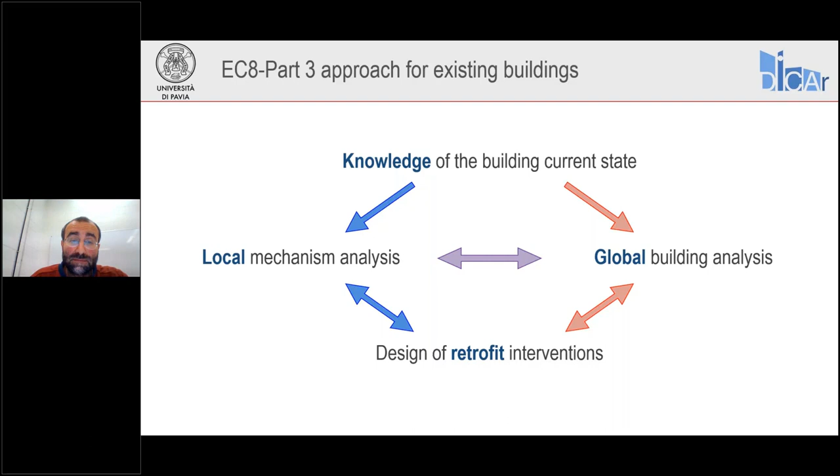So let's start from the first ingredient of the framework, that is the knowledge of the building that we are analyzing. Now, there is a useful table in Eurocode 8, table 3.1. When I say Eurocode 8 for existing buildings, I'm always referring to Eurocode 8 Part 3. This table basically defines different levels of knowledge. We have three levels of knowledge, and it allows us to determine in which of these levels we are, given the knowledge that we have about our building.

The first part of this knowledge is related to geometry. To determine the geometry of the building, we can make use of outline construction drawings if they are available, if we can find them. For historical buildings, this may not be so easy. For more modern buildings, instead, it's more likely that we can find them. Then we may have to carry out some surveys in the field. If we have good construction drawings, a visual survey may be enough just to confirm that the drawings correspond to reality, or to adjust where we have some inconsistencies.

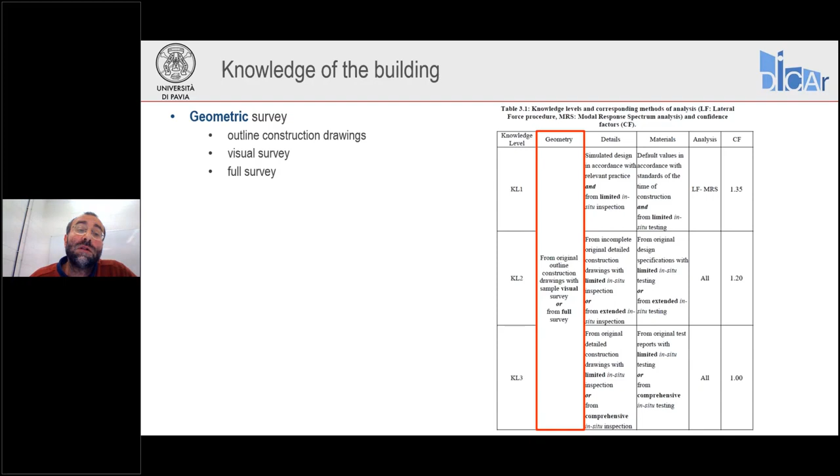But in some cases, especially if we don't have any drawings available, we may have to carry out a full survey of the building. Then we need to investigate the construction details of the building. In the most unlucky case, we may have to carry out a simulated design if we don't have any information. But in some cases, we may be able to find detailed construction drawings where these construction details are shown. In any case, we also have to go on site and perform some inspections, which can be more or less limited, extended, or comprehensive, depending on what knowledge level we want to reach, and also on the available material in terms of construction drawings that we have found.

Then we need to characterize the materials of our building. Again, we may need to refer to some default values, but we may also be more lucky and have sources such as original design documentation or original material testing results, and we may be able to refer to these values. In any case, it's also better to perform some on-site testing, and again this testing can be more or less extended, going from limited to comprehensive, depending on the amount of elements that we are investigating, again to confirm the choices or assumptions that we are making.

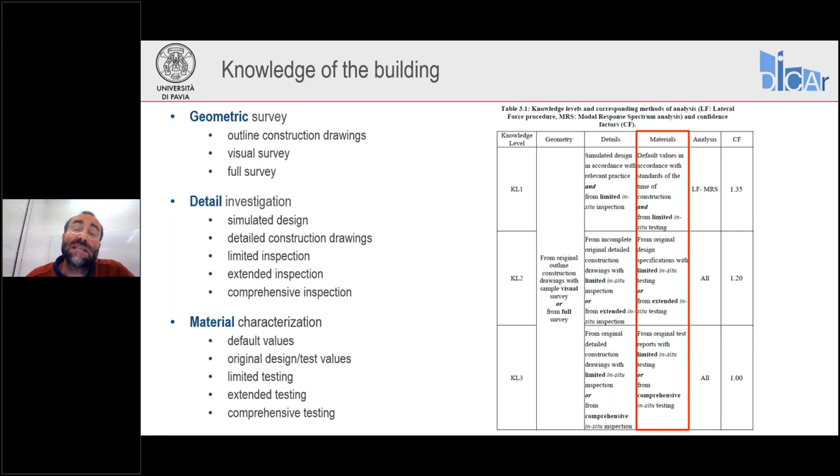At this point, we can define our knowledge level, depending on the combination of available documentation, on-site inspection, and testing that we have carried out. We have three levels of knowledge: KL1, KL2, and KL3.

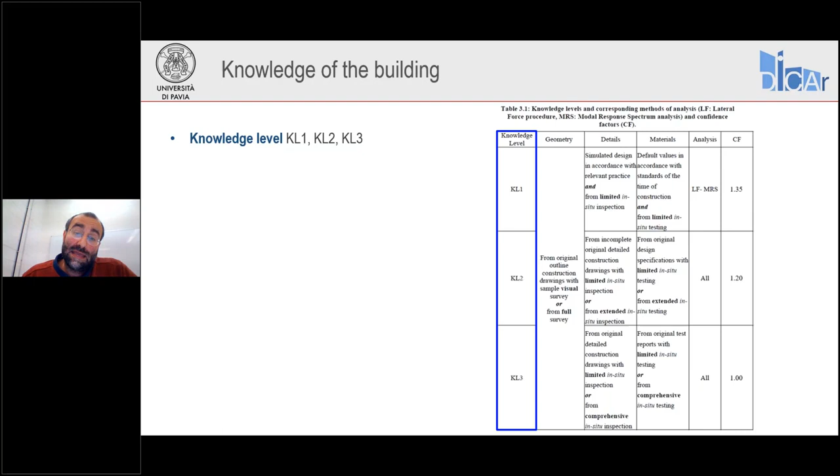Each knowledge level is associated with possible analysis methods for the global analysis of the building. If we are in the less favorable case of knowledge level KL1, where we have less information, we can only carry out elastic analysis, which is usually more conservative. We don't have enough information to build a nonlinear model, so we need to go with the more conservative methods.

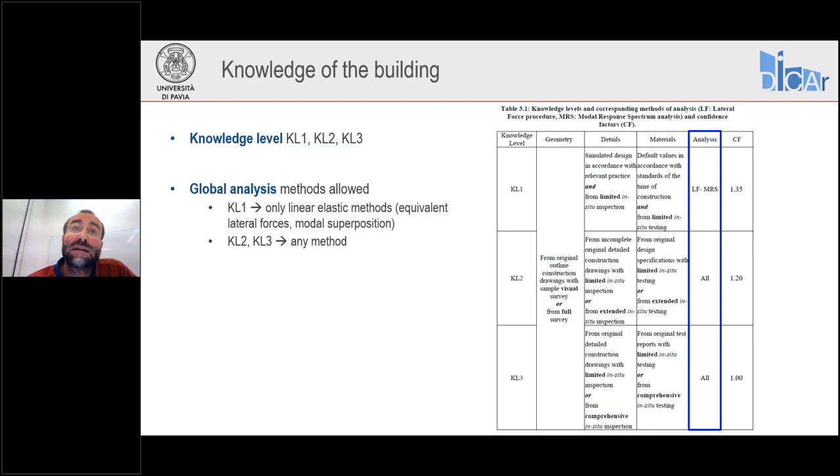If we have more information available, more documents, or carry out more on-site investigation and testing, then we can be in knowledge level 2 or 3. In this case, we can use any method: linear, elastic, or nonlinear, static or dynamic analysis.

Also, from this table, depending on the knowledge level, we can get the so-called confidence factors CF. These factors are usually applied to material properties. When we calculate the strength of members in terms of capacity, we use these factors to reduce the average values of the material properties.

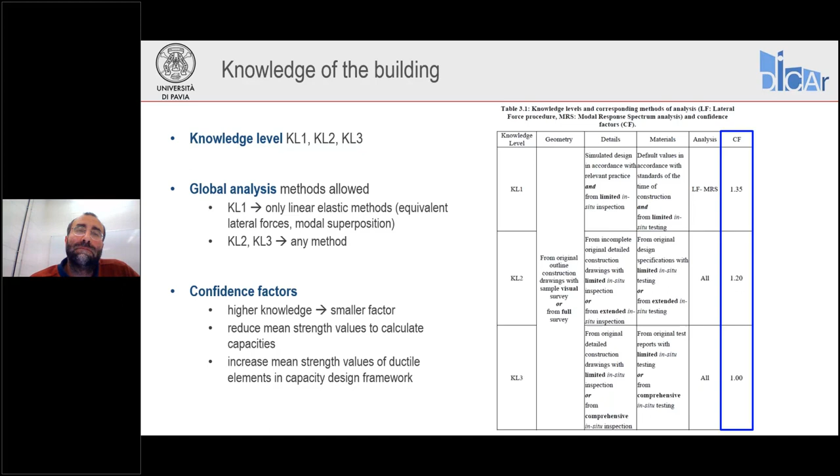You can see that these confidence factors decrease from 1.35 to 1.0 as the knowledge level increases. But these factors are also used to increase the mean strength values when calculating the strength of ductile elements, to find the forces transferred to brittle elements in a framework of the capacity design type.

Now, how do we obtain this information? First of all, we try to find any document available about the building, so we can carry out a historical analysis and document investigation, looking for original drawings, permits, whatever we can find in public offices, designer offices, wherever we can find information about the building.

We may also try to investigate the history of the building in terms of construction process, modifications that have occurred over time, trying to understand if the materials are consistent throughout the building, or if there are additions or modifications with new or different materials compared to the original ones.

We may also need to refer to historical practices and look for older codes, if there were codes at the time of construction, because this may guide us in understanding how the structure was built.

Finally, we also want to find information about any possible damaging event that the building may have undergone, and these events may have created weaknesses, or induced modifications or retrofits in the past.

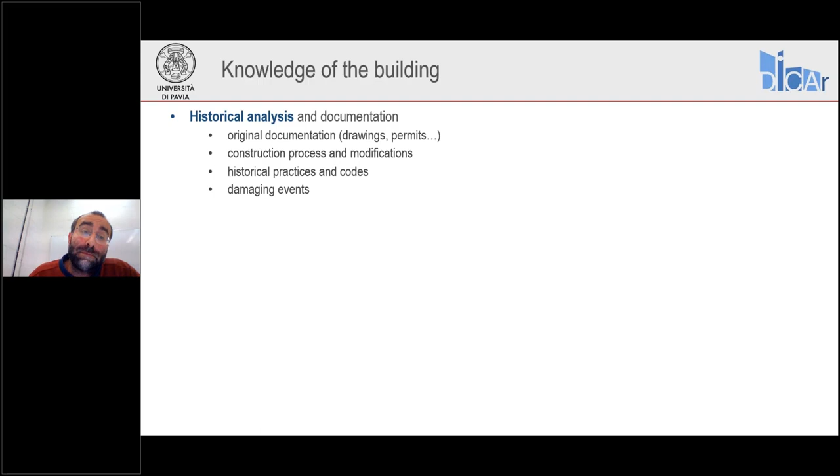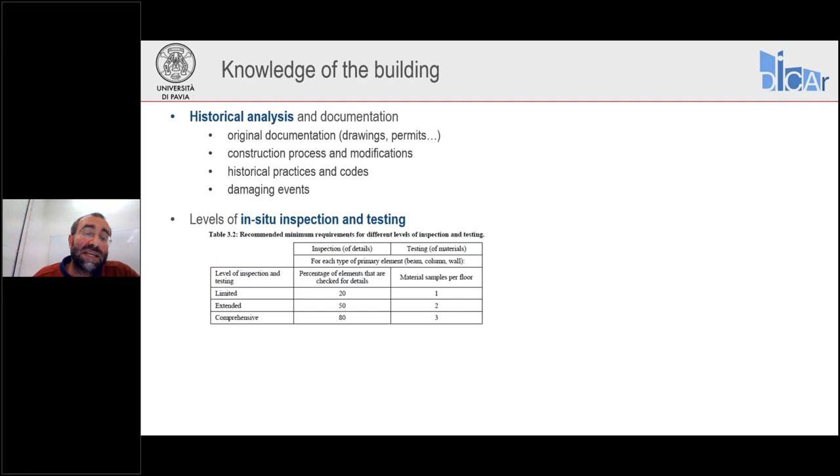Then, as I was saying, we will have to carry out on-site investigations, inspection of details, and material testing. The Eurocode provides another table which guides us on the amount of elements that need to be investigated in order to reach these limited, extended, or comprehensive levels of inspection and testing.

Finally, in terms of material properties, it's always the case to carry out some non-destructive and destructive tests on the building, in different amounts depending on the knowledge level that we want to reach.

For this, we can use, for example for masonry structures, flat jack test, shove test. We may even take samples of masonry and bring them to the lab, where we can perform direct shear tests on triplets.

So there are quite a few different destructive techniques that can be used, and they can be combined with non-destructive methods, because we need to calibrate these non-destructive methods with the results of the destructive tests.

But now we have a problem. We cannot test the material everywhere in a structure, especially with historical buildings that may have undergone modifications over time, where materials can differ depending on where we are. We may not be able to investigate all different types of materials, or we may select a region of the building where material properties are higher or lower than elsewhere.

So how can we deal with this? The Eurocode doesn't tell us much - it says we can refer to other sources of information, but doesn't specify which ones. With the Italian code, the so-called NTC 2018, we find some guidelines on what reference values to use to integrate the results of on-site testing.

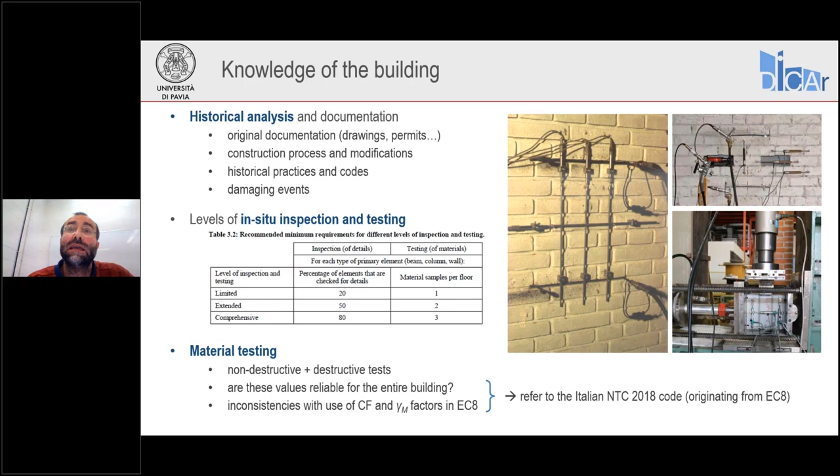Again, we can look for some guidance in the Italian code also for this aspect. Why the Italian code? Well, it stems from Eurocode 8, so it's somehow compatible with the framework proposed by Eurocode. However, differently from the Eurocode, it has been widely applied in practice since 2003, with further modification. The first edition of these guidelines was in 2003.

So in the NTC 2018, we can find a table with material property ranges. It's important to consider these as ranges. We have minimum and maximum values for different properties: compressive strength, shear strength, elastic modulus, shear modulus, for different types of masonry, starting from irregular rubble stone masonry, going all the way to more modern and more organized masonry textures.

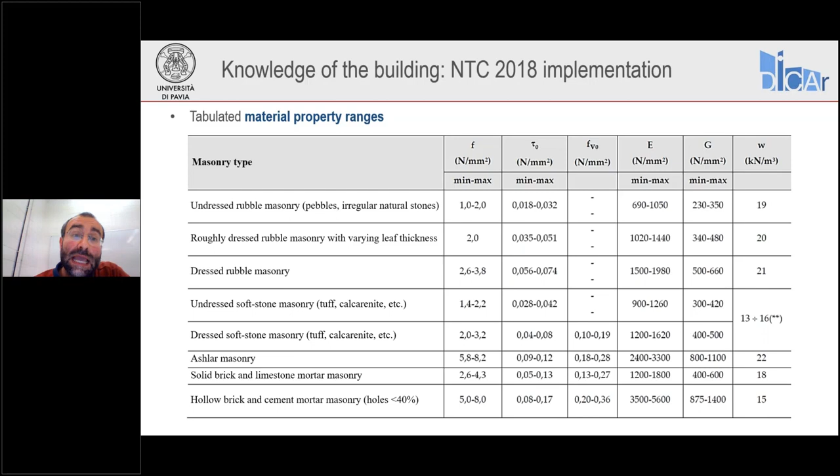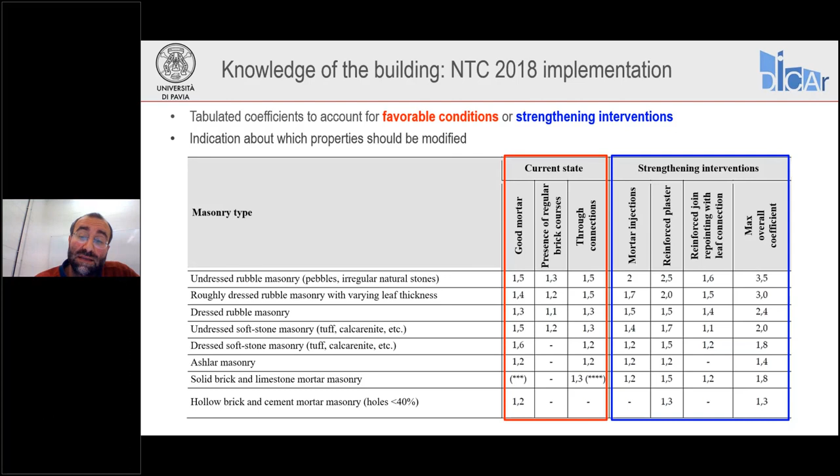Looking at these tabulated values, the Italian code says that if we are in the lower knowledge level, KL1, we need to take from these tables the minimum strength values and the mean elastic moduli values, and the strength values shall be reduced by a confidence factor of 1.35 as in the Eurocode. In knowledge level 2 instead, we take the mean tabulated strength values and elastic moduli, and the confidence factor reduces to 1.2 as in the Eurocode. Finally, if we are in knowledge level KL3, we can combine the mean tabulated strength values and elastic moduli with those determined from on-site testing.

And we perform a so-called Bayesian update procedure. We will see this better in the next webinar of this series, where these aspects will be treated more in depth, showing how to perform this procedure.

Now, this is not yet in the current edition of the Eurocode, but something similar to what is in the Italian NTC 2018 will be included in the upcoming edition of Eurocode. So you will find in the new edition something similar to what is presented here, based on the existing Italian code. Also, the tabulated reference properties will somehow be included in the new Eurocode version.

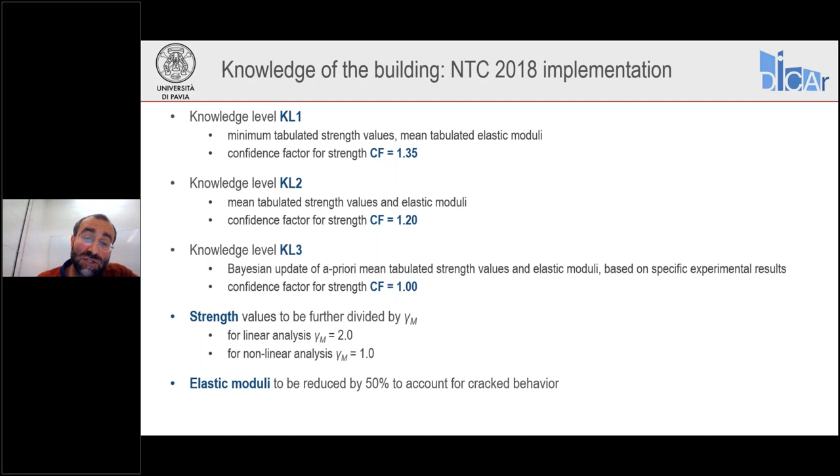The last aspect I want to mention about knowledge of the building is, in reality, what performance requirements we have to expect and ask of our building—so what are the limit states we have to consider? The Eurocode for existing buildings, Part 3, mentions 3 limit states: 2 ultimate limit states, near collapse and significant damage, and 1 serviceability limit state, damage limitation. Consider that significant damage is very close to the no collapse limit state in Part 1 of Eurocode 8, the one for new construction. In the Italian code, there is also a 4th limit state, another serviceability limit state, full operationality, which is not included in Eurocode.

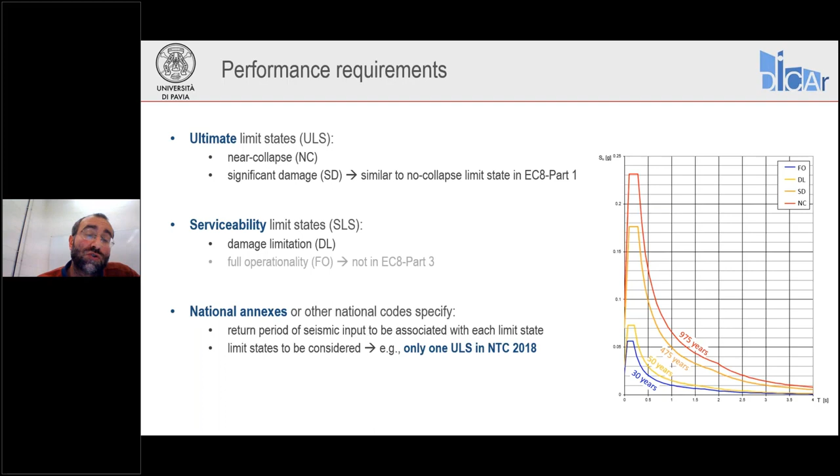EC8 refers to national annexes or other national documentation for the selection of the return periods associated to each limit state, and also to select which limit states should be considered in the analysis. For example, if you follow NTC 2018, for most buildings we only need to refer to 1 ultimate limit state, either near collapse or significant damage—we just verify one of these. Only for strategical buildings do we need to also consider serviceability conditions.

Now, let's move to the next ingredient of the framework, which is the analysis for local mechanisms. Let's start from this video of a shake table test of a masonry building that was performed at the EUCENTRE laboratory a few years ago.

If you look at the yellow circles, you will see that the facade, excited out of plane of the building, is trying to overturn out of plane, developing a so-called local mechanism. This building was not retrofitted in any way. There were no restraints to that facade, and you can see that a mechanism of this type developed at a level of PGA equal to 0.4 G using the 1979 Montenegro earthquake.

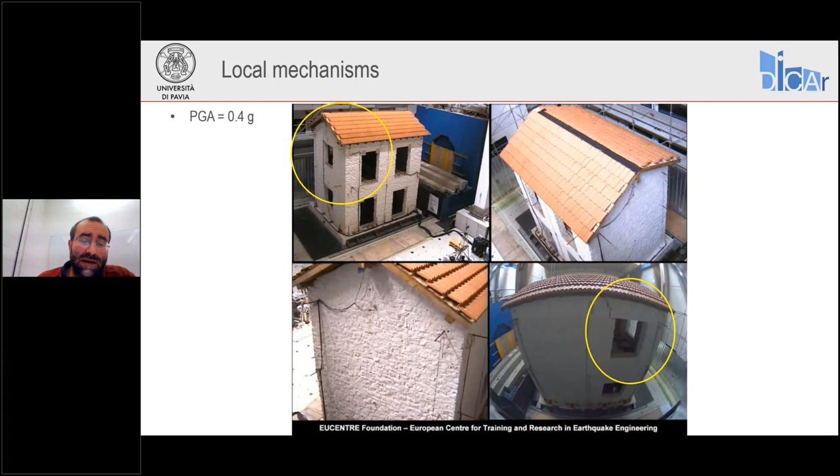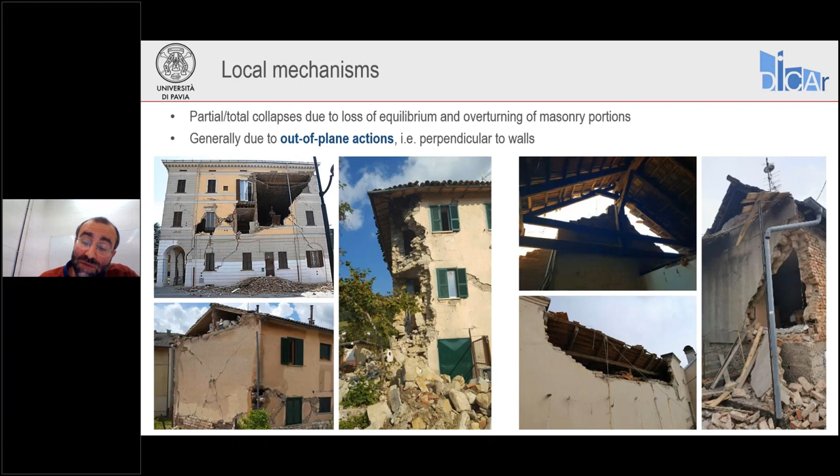What are these local mechanisms? Well, these are failure modes that are related to loss of equilibrium of portions of masonry, related to overturning out of plane of these portions of masonry, leading to partial or total collapses. Usually they are due to out of plane actions, that is, accelerations acting perpendicularly to the wall panels.

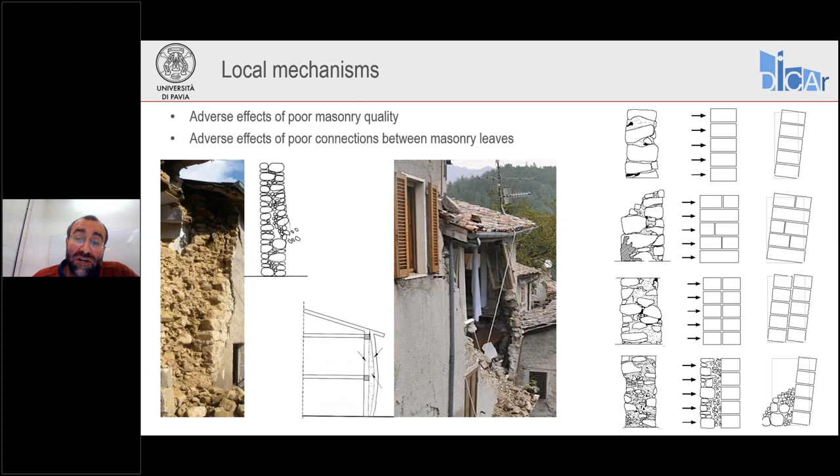These local mechanisms are usually adversely affected by the quality of masonry. For example, if we have rubble stone masonry with very poor mortar, or with round stones, with masonry leaves poorly connected with each other, with loose filling between the leaves, all these conditions may lead to the development of local mechanisms, starting from buckling of masonry leaves and loss of infill to overall overturning of these walls.

Also, the thrusts coming from roof beams, from arches and vaults may have an adverse effect on this local mechanism. They may push outwards the walls. And also irregularities in plan and in elevation may cause the activation of such mechanisms.

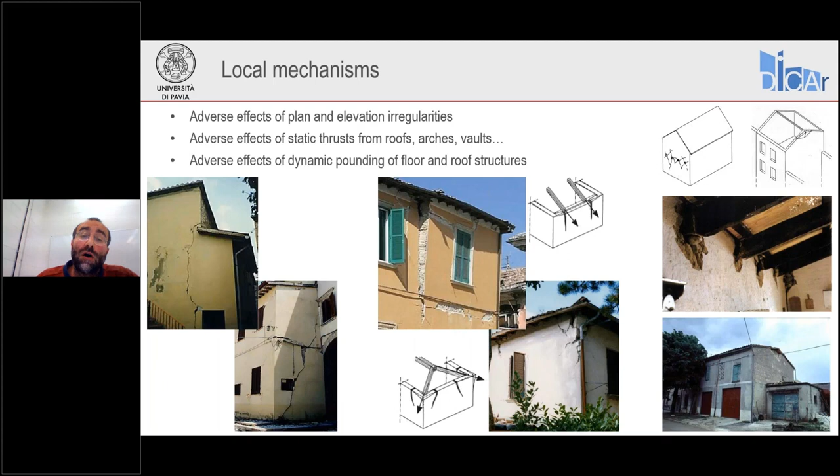Finally, pounding between poorly connected floor or roof diaphragms and walls can also lead to the development of this local overturning response.

Instead, we can find favorable conditions when we have good interlocking between intersecting walls. You see here on the left-hand side, we have a case of weak interlock between the perpendicular walls. And in this case, as shown in the photo, you can see that one of these walls is detaching from the rest of the building in an overturning mechanism.

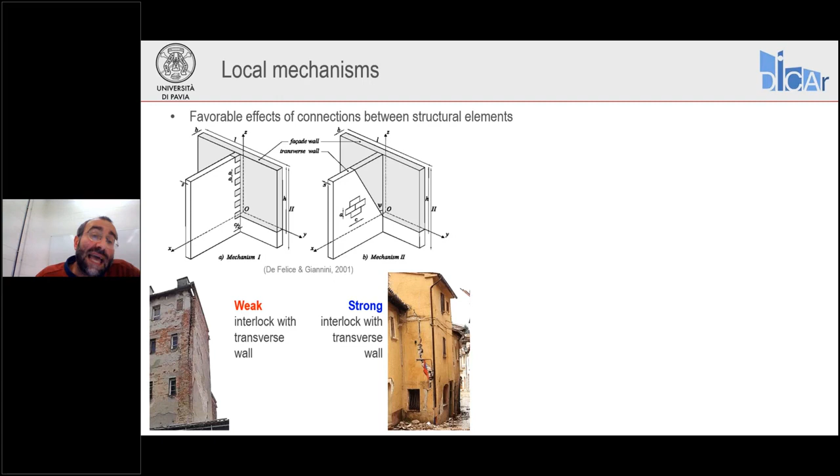Instead, if we have good, strong interlock between the intersecting walls, as in the right-hand side case, we can see that for the wall to overturn out of plane, it has to engage a wedge of the intersecting wall. And if the intersecting wall is supporting a floor system, for example, the weight of the floor may help balancing the wedge and basically delaying the activation of this out-of-plane mechanism.

In general, if we have weak interlock between walls and poor wall-to-diaphragm connections or flexible diaphragms, we may be in the most unfavorable case where walls can separate from each other and easily overturn out of plane.

If we improve the interlock between perpendicular walls, but still connections and stiffness of diaphragms are not so good, we may be in a better situation, but still we may have local mechanisms related to bending of the walls out of plane. Instead, if we are able to improve the connection between intersecting walls and the connections and stiffness of floor diaphragms, we may be in the most desirable case.

We develop a so-called box type behavior for the building, as in the bottom case on the right-hand side of the slide. This is the situation that we would like ideally to have.

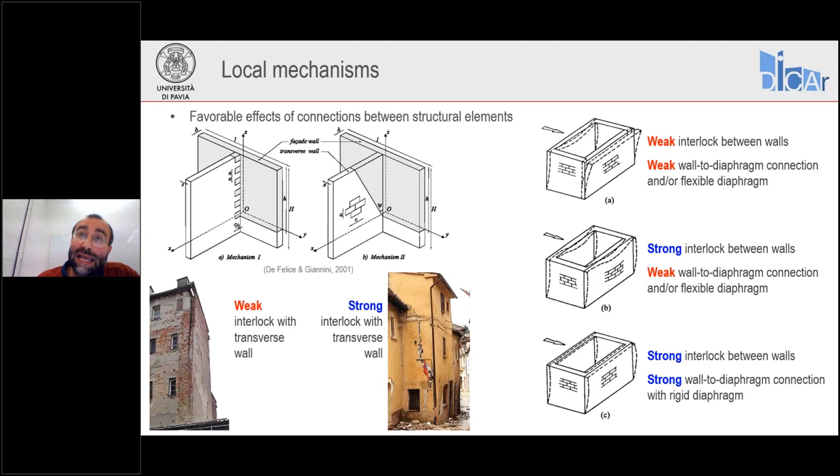How do we analyze local mechanisms? Well, the Eurocode 8 Part 3 doesn't say anything about this topic. The new edition will, but the current one doesn't say anything. So again, we refer to the Italian code, where we find, as the preferred method of analysis, the so-called kinematic analysis.

In this case, the wall responding out of plane is discretized in a series of rigid bodies forming a single degree of freedom mechanism. These blocks are defined by actual cracks that may form in the development of the mechanisms. And the different blocks that are bound by cracks can rotate and slide rigidly with respect to each other. It's a simplification, but it's quite powerful.

Then what we do is study a so-called load multiplier alpha that represents the ratio between the horizontal seismic forces and the weights of the blocks, and the weights also applied by the floors and other structural members involved in the mechanism.

Now, this method is based on the so-called upper bound theorem of limit analysis. What does this mean? It means that the actual mechanism that will develop in a given wall is the one associated with a smaller activation acceleration.

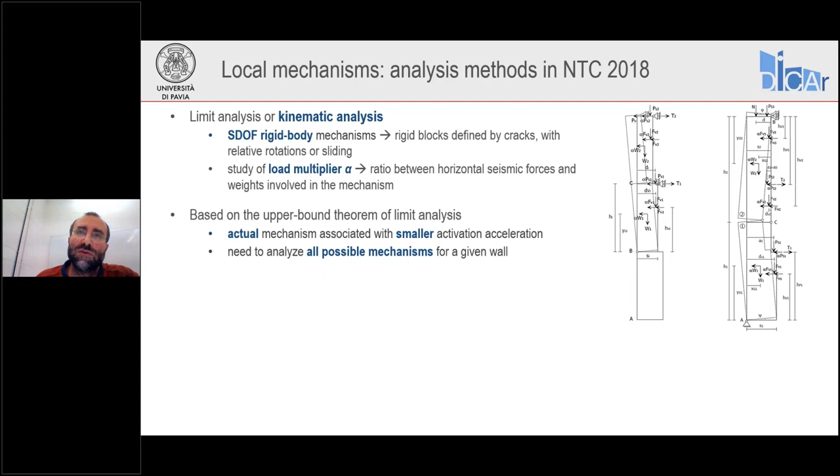Then once the mechanism activates, there will be out-of-plane displacement of the wall. And before reaching an unstable condition, this displacement could be quite large. If we want to investigate this behavior after activation of the mechanism up to collapse, which corresponds to displacement DC0, this is the displacement of a control node of the mechanism.

Well, if we want to look at what happens between activation and collapse, then we need to perform a nonlinear kinematic analysis. With linear kinematic analysis, we consider the acceleration and strength checks at ultimate conditions, while with nonlinear kinematic analysis, we look at the displacement, demand, and capacity of the mechanism.

Linear kinematic analysis is more conservative because as long as the mechanism is activated, for us, it means that you're at the limit. Nonlinear kinematic analysis is more generous because a mechanism may activate, but we may be far from collapse after activation. And so we can exploit more the capacity of the structure if we use this type of analysis.

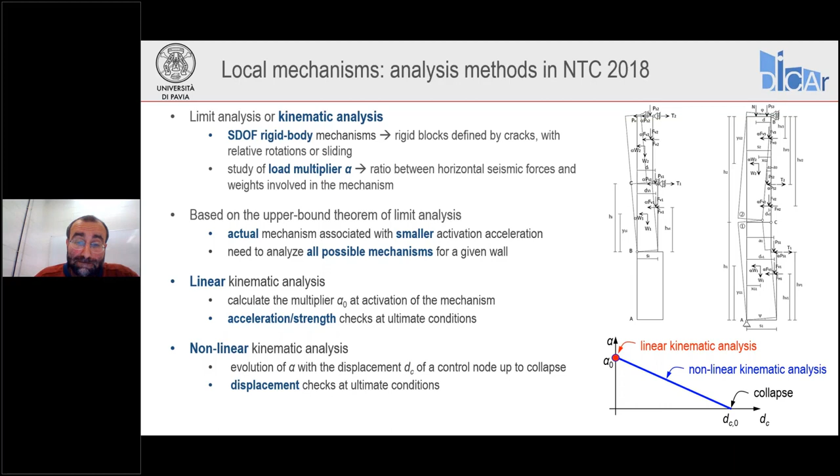How to determine the demand? Well, we have to consider that local mechanisms involving portions of masonry should be considered with their interaction with the overall global structure. There is a dynamic interaction. It's like if we have a multiple degree of freedom system.

Look at the figure at the bottom left. M1 represents the first mode mass of the overall structure. M star, the red smaller mass, is the one associated with the local mechanism only. And it's like having a two mass system in series. So the response of the small mass depends on its interaction with the big mass.

However, if this small mass, the mechanism mass, is significantly smaller compared to the overall mass of the building, then we can make an approximation. We can think of decoupling the two responses, the global response of the building to the ground excitation and the local response of the mechanism, using as input for the local response the global output of the building.

So basically we treat the overall building as a filter between the ground and the local mechanism. We can do this again if the mass involved in the local mechanism is quite smaller compared to the overall mass of the structure, especially the first mode mass, because usually we refer to the first mode.

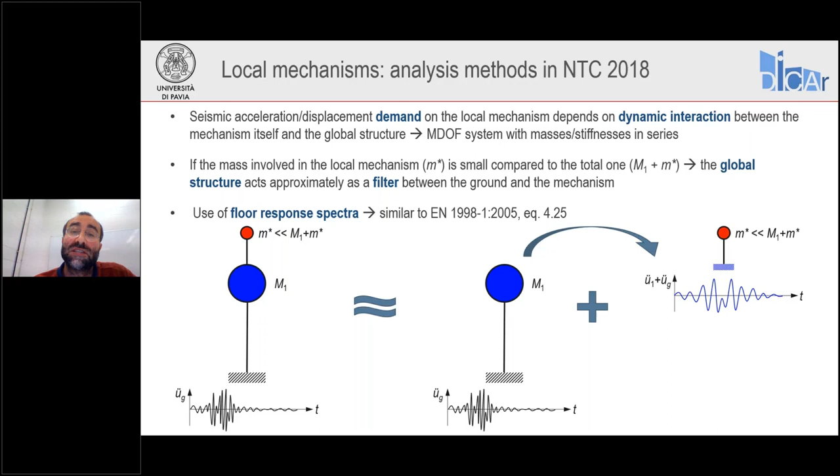In the new edition of Eurocode 8, we will find something more refined than what we have in the current version. And also in the NTC 2018, we find a more refined approach to determine the floor response spectra.

How can we improve the local response of the structure? There are several retrofit solutions that can be adopted. First of all is improving the masonry quality. In this case, we want to delay disgregation of the masonry, or we want to increase the out-of-plane flexural strength of the masonry.

Some techniques involve joint repointing. If the mortar is bad, we can replace part of the mortar joints with new, better mortar. We may also make use of grout injections. These are appropriate if we have a loose filling between the two masonry leaves, so we may want to give some consistency to this filling by injecting grout.

If the masonry is damaged, we may want to replace portions of damaged masonry with new masonry, with the so-called masonry stitching technique. Or we may want to adopt some reinforced repointing across existing cracks.

If we want to improve the flexural response out of plane, we may add vertical reinforcement in slots within the masonry walls. And if we want to prevent separation between masonry leaves, we can use reinforced injections through the thickness of the wall, engaging the two exterior leaves.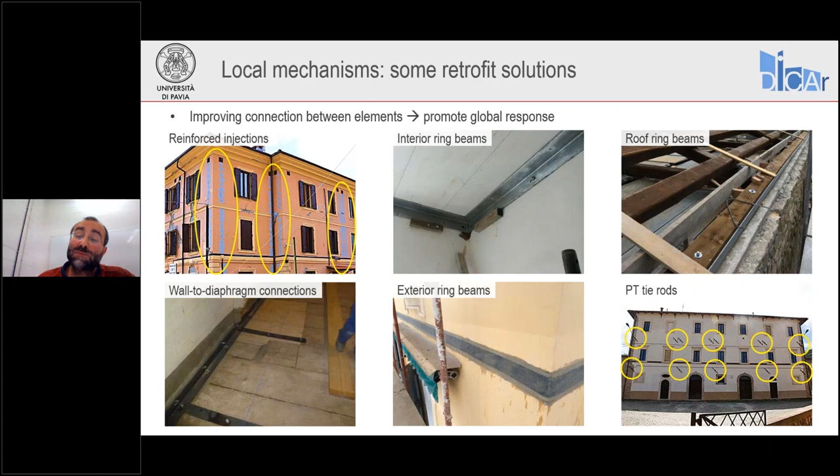Now, if we don't have problems with local mechanisms that are usually responsible for many cases of collapses in masonry buildings, then we can start thinking about the global response of the structure. Let's look again at an experiment.

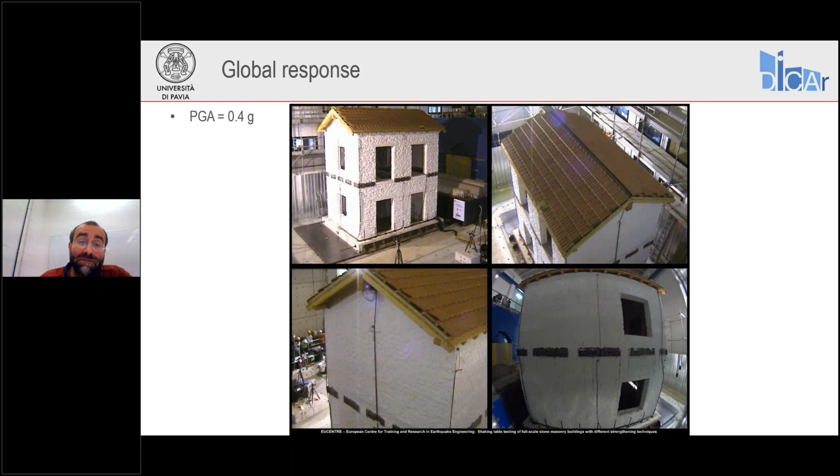This is a building similar to the one we have seen before, but in this case we have a concrete ring beam at the roof and we have stiffened the diaphragms. At the same level of PGA, same input, there is no visible damage from these videos. Same level of input, very similar building, but with improved connections and a stiffened diaphragm. So we go to 0.6 G of PGA, 50% higher, and look at the bottom right.

You see diagonal shear cracks forming in that pier. This is now an in-plane failure mechanism. No out-of-plane overturning of any portions of the walls. We have only in-plane shear failure of that pier. So in this case, we can take more advantage of the strength associated with our masonry walls.

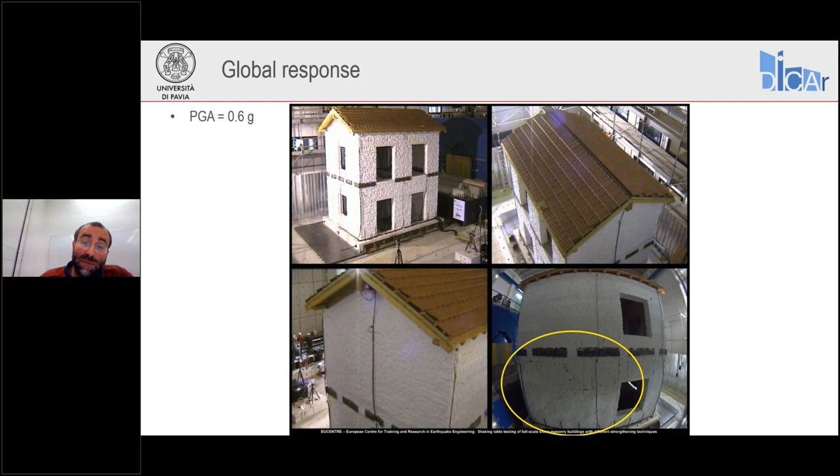Now, when we talk about global response, we are thinking about in-plane response of masonry walls and also of floor and roof diaphragms. Masonry walls typically consist of vertical piers, horizontal spandrels that meet at nodal regions.

Floor and roof diaphragms can be made of timber or other construction techniques, can be steel elements with masonry blocks, can be concrete overlay if the construction is more modern, or we may have vaults if we are talking about more historical buildings. So different systems that provide horizontal connection between the walls.

If we want to be able to consider the global response of the building, we need to have prevented, or mostly prevented, the out-of-plane mechanisms of the walls, so that we can develop in-plane failure mechanisms of piers and spandrels. If all spandrels fail within a facade, we can say we are developing a spandrel mechanism, while if at a given story all piers are failing, we talk about a soft story mechanism.

If you look at the photo, bottom right of the slide, you will see an example. This building was in Amatrice. It was involved in the 2016 earthquake. And you can see that in this building, all spandrels and piers have responded in shear.

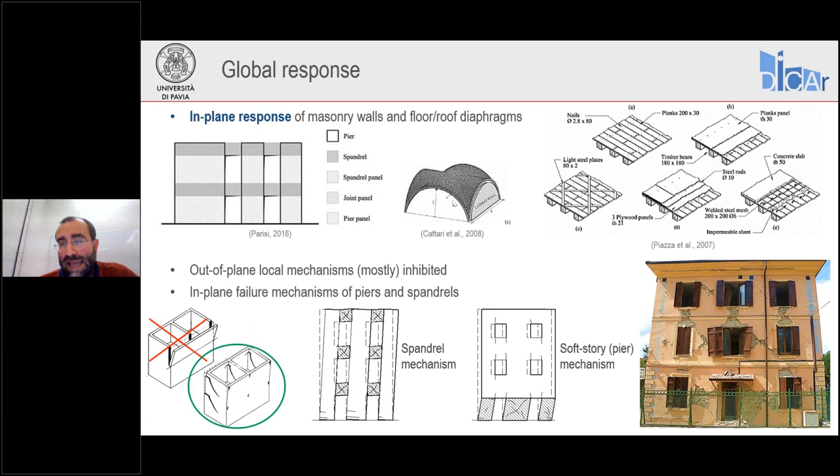We have taken advantage of the strength of all elements in this wall, where the out-of-plane mechanisms were prevented by grouted injections at wall intersections and by steel ties. So in this case, the full strength of the building was used during the earthquake, and in fact, it didn't collapse. It was severely damaged, and in the end it was demolished, but it didn't collapse.

Now, in the Eurocode, we find some criteria related to strength of piers and spandrels. Typically, at the ends of the elements, we can develop cracks perpendicular to the axis of the element related to flexural response. Over these horizontal cracks in the piers, vertical cracks in the spandrels, we may develop sliding. Another mechanism that can develop is diagonal shear cracking.

This usually happens within the panel, pier or spandrel. And depending on the type of masonry and on the strength of the joint, we may have stair-step cracks within weak joints, or cracks cutting through the masonry units if we have strong joints compared to the unit strength, or if we have irregular masonry.

Now, in the Eurocode, we find criteria related to flexural response, flexural strength, and shear sliding strength. We don't find anything about diagonal shear cracking, but we can find information about this criterion in the NTC 2018 code. In any case, varying the axial force acting on the element, any of these criteria will provide a different strength value, flexural or shear strength. So varying the axial stress on the element, one or the other criterion may control the strength.

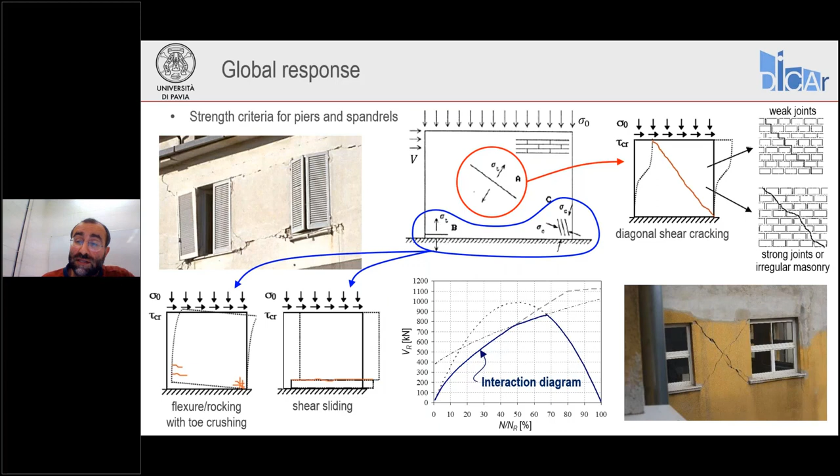In terms of modeling of the walls, we can either use 3D finite elements, but this requires quite detailed knowledge of the material, and it's quite a time-consuming analysis. Or in most cases in practice, we use a so-called equivalent frame approach, where we make use of macro elements and rigid nodes. So you can see we can identify spandrel elements, pier elements, and rigid nodes.

And then we can build our equivalent frame. And in the literature, we can find criteria on how to define the dimensions and the boundaries between the different components of the equivalent frame.

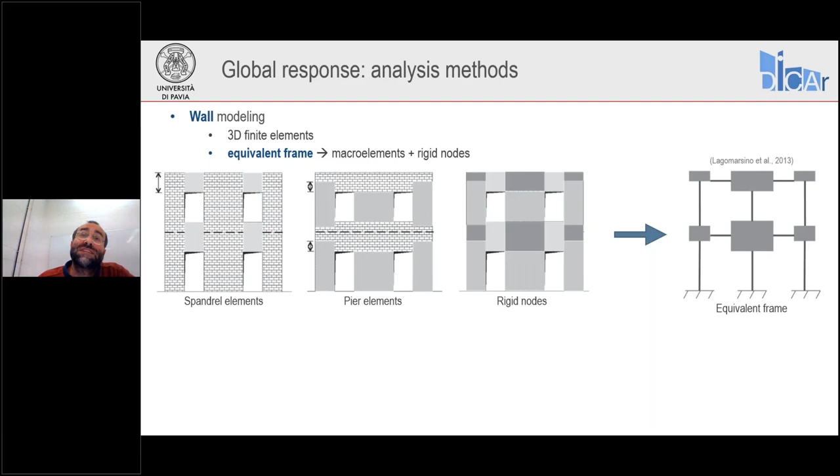Now, this is easy if the wall has regular openings. If openings are irregularly distributed, things become a little bit more complicated. And one of our webinars will be dedicated to how to tackle this particular situation of irregular opening distribution.

We also need to model the diaphragms, the horizontal diaphragms connecting the different walls. And usually we have three different cases. First case is infinitely rigid diaphragms. This is the case when we have, for example, a concrete overlay well connected to timber or steel joists. And these rigid diaphragms allow for a redistribution of the story shears based on the relative stiffness or strength and the in-plan position of the piers and the walls.

Instead, if the diaphragm is infinitely flexible, it cannot redistribute story shears between walls and piers. And in this case, it is advisable to analyze each wall independently, considering its tributary mass. And this tributary mass will produce the excitation on that individual wall.

Finally, the most common case, of course, is intermediate between these two. We have diaphragms of finite stiffness. In this case, we need to evaluate the stiffness based on the construction technique that we have in our situation, and we can use, for example, orthotropic membranes. This is what the program Tremuri, for example, does. And the two axial stiffnesses and the shear stiffness of the orthotropic membrane is calibrated based on the actual properties of the physical floor or roof system.

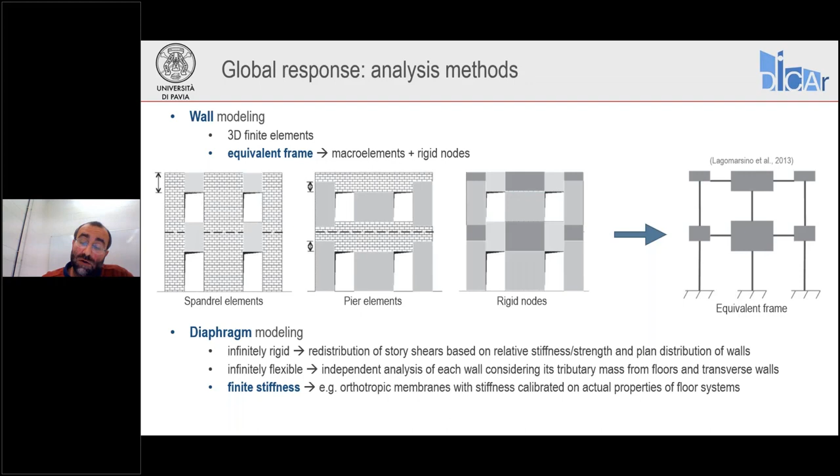The analysis can be based on linear approaches, and in this case, we have to perform strength or deformation checks on the elements of the building.

This is, for example, the case of linear dynamic analysis, where we superpose the different modal responses, but even simpler is the case of equivalent lateral force analysis, which is the linear static analysis, which is very conservative usually for masonry buildings. And depending on whether we are using the full elastic spectrum or we are applying the behavior factor Q, we may have to check deformations of the elements or strength of the elements.

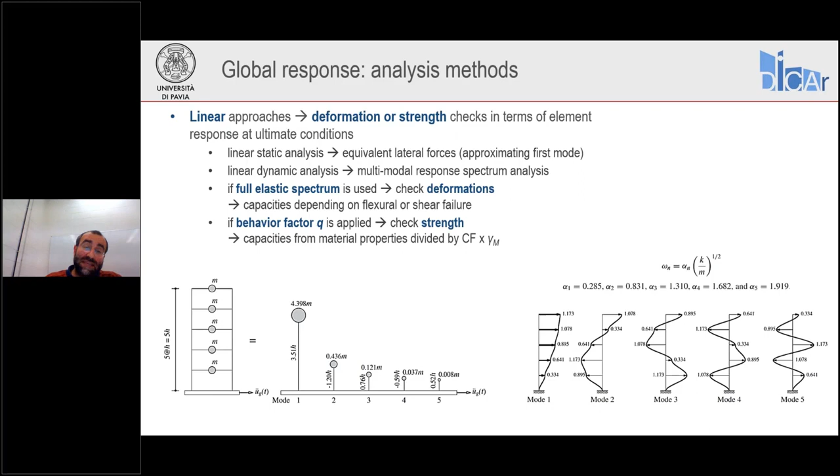However, for masonry structures, it's better to use a nonlinear method of analysis for the global response. In this case, we check displacements in terms of global building response. This is more advisable because it's less conservative and more representative of the actual response of the building. It's not limited to an elastic analysis, but accounts for the development of nonlinearities and failure of some elements, which may not preclude the capacity of the building to resist vertical loads and still resist part of the horizontal loads.

We can have static or dynamic analysis, also in case of nonlinear analysis. In the case of static analysis, we perform a pushover analysis in each principal direction of the building. We obtain a capacity curve in terms of base shear and displacement of a control node at the roof level, and we compare this with an inelastic spectral displacement demand. So we have to transform elastic design spectra into inelastic spectra according to the Eurocode formulation. We will see how to do this in one of our webinars.

If we perform nonlinear dynamic analysis, what is the difference? The difference is in the calculation of the demand, because from the nonlinear dynamic analysis, we obtain directly the displacement demand. Again, we can compare this displacement demand with the static capacity curve obtained from a pushover analysis. So the difference between the two methods is how we calculate the displacement demand. In any case, we have to perform pushover analysis to obtain static capacity curves.

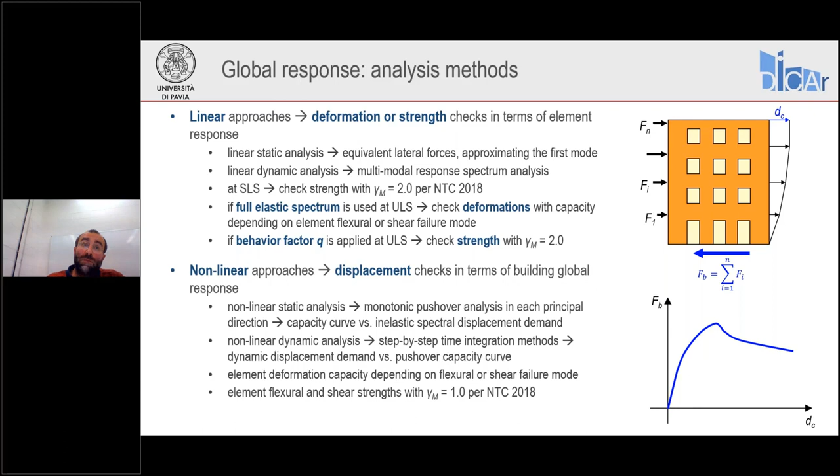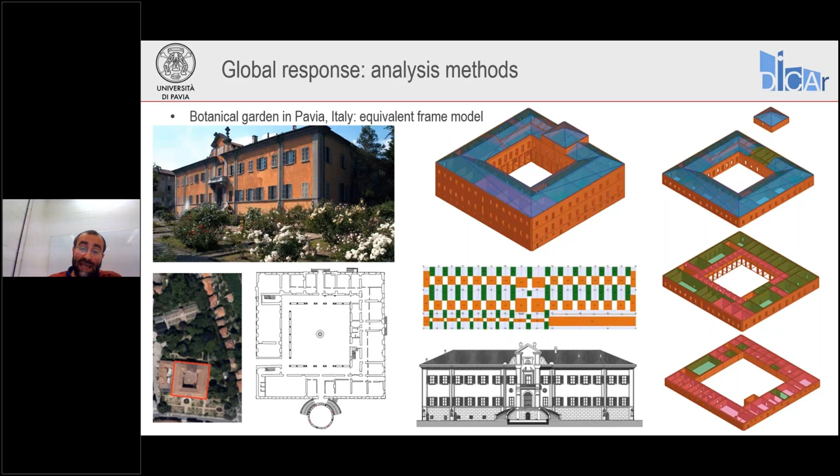This is an example of a building here in Pavia, the botanical garden. You can see some photos and a floor plan of the building and the equivalent frame model obtained from this same building. The model was subjected to a nonlinear pushover analysis. Here you can see at the top right the capacity curve in black, and then in red the bilinear approximation. We'll talk about this in one of the next webinars.

We define failure in this case when the black curve drops by 20% from the maximum base shear achieved in that direction, and this corresponds to failure of the wall highlighted within the red circle in the model. It's not the full facade, which is still in decent condition. We reached shear strength, but not the maximum available deformation, except for one element in the main facade. However, in this shorter wall, the main elements have completely failed, and this defined the ultimate capacity of the structure—again, the 20% drop from the maximum strength.

The demand comes from the design spectra. In this case, we consider the near collapse situation. The associated spectrum, according to the Italian code, has a return period of 2,475 years. It's the red one in the figure, and it gives the displacement demand shown on the pushover curve. You see that the displacement demand is smaller than the ultimate displacement capacity, so the building is verified for the seismic input of the region.

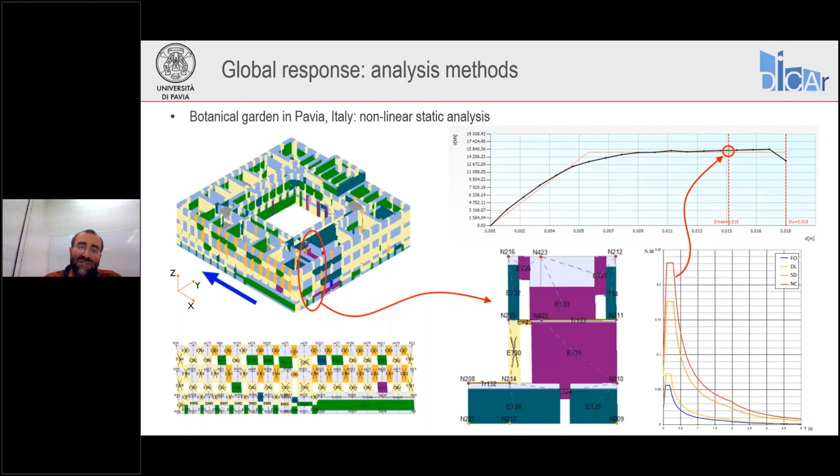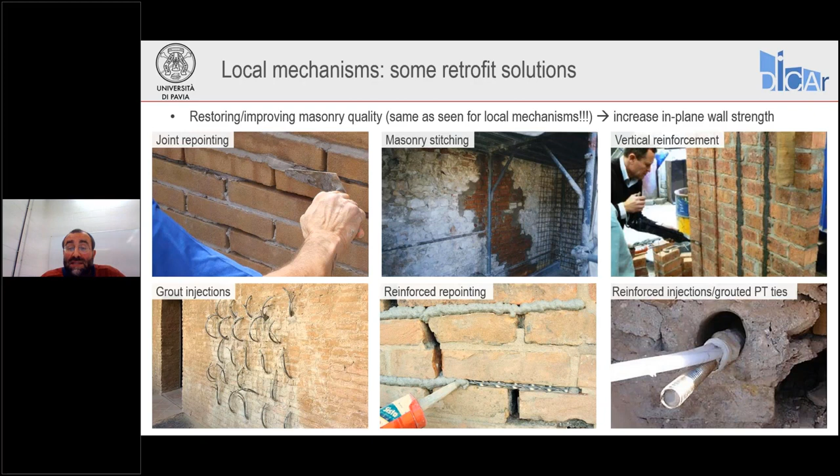How to improve the in-plane response? First, we can try to improve the masonry quality. The techniques are the same as those already discussed for local mechanisms, but here we want to increase the in-plane strength. We can also use techniques related to jacketing with reinforced plaster or fabric reinforced cementitious matrices, applied to the surface of the masonry. We also use FRPs, fiber reinforced polymers, though in this case we may have compatibility issues with historical masonry substrates.

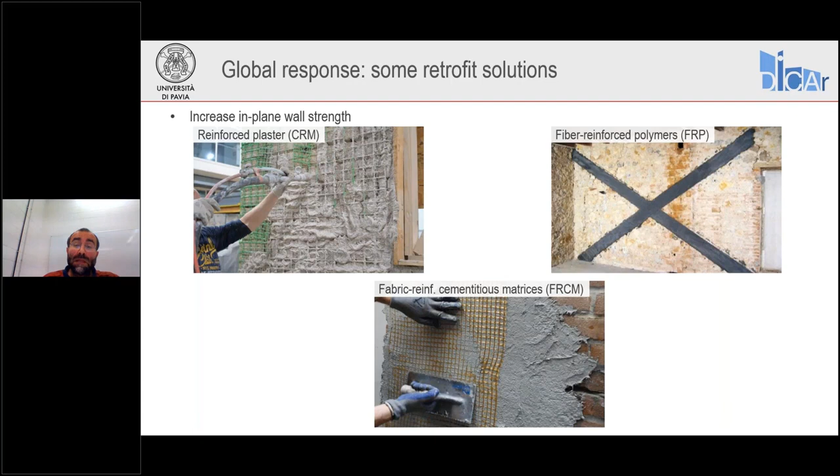We may also improve the stiffness and strength of the diaphragms, with several techniques depending on the type of diaphragm. For timber diaphragms, we can add additional timber overlays, increase the number of nails, add steel or composite strips or braces, or add plywood or even concrete overlays. Different solutions depending on the objective.

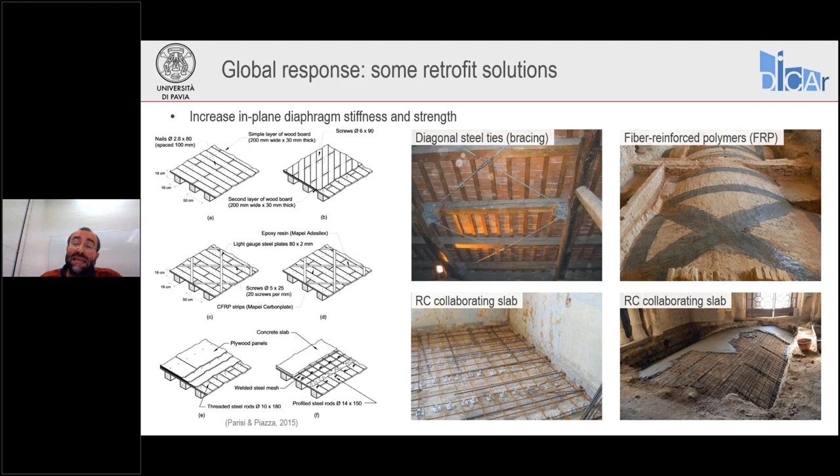For vaults, again, we can add concrete overlays, apply FRCMs, or apply FRPs, to improve the in-plane stiffness of these elements.

Now, with this, I have concluded my presentation.